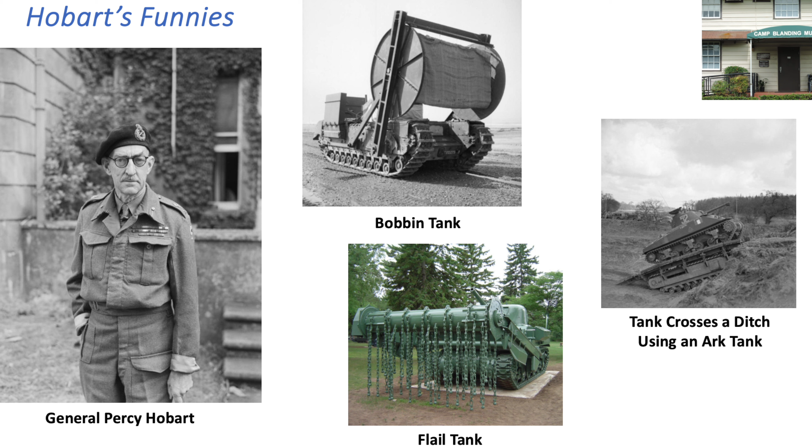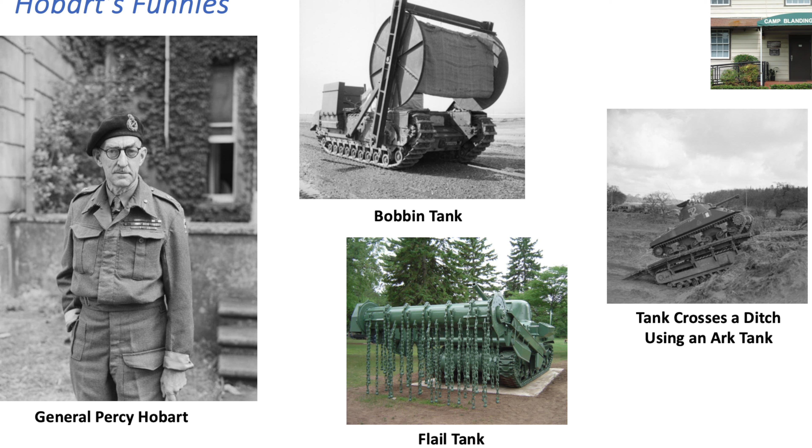The swimming DD, duplex drive Donald Duck tank, was part of a special group of tanks often referred to as Hobart's Funnies. So Hobart's Funnies were tanks modified for special purposes. For example, the bobbin tank could lay down a mat across sand to allow vehicles to cross that sand or areas of soft soil. Or an Ark tank carried a bridge superstructure that could be used to provide passage over an anti-tank ditch or a creek.

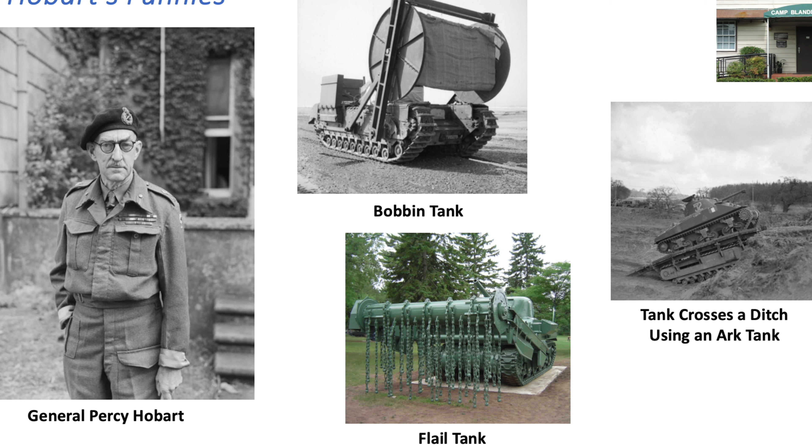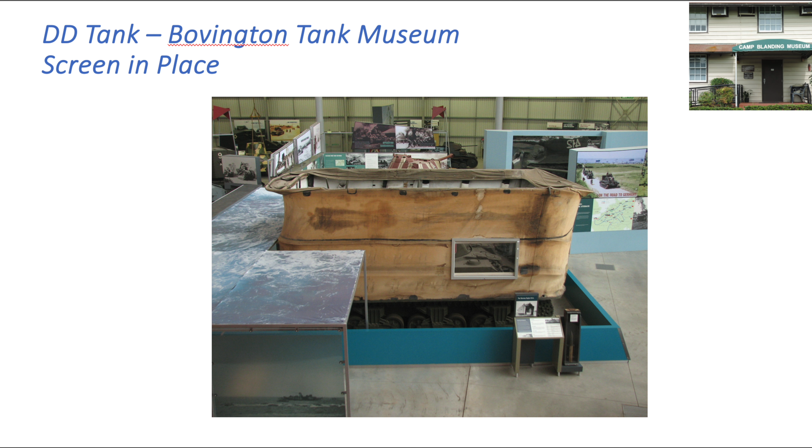Or a flail tank with its rotating drum and chains could be used to clear a path through an enemy minefield. One of the Hobart's Funnies was the swimming, or DD, duplex drive tank. The DD tank shown in this slide is on display in the Bovington, England Tank Museum. The Allies' DD tank design was invented by the Hungarian Nicholas Straussler. Straussler's design provided temporary flotation for the tank.

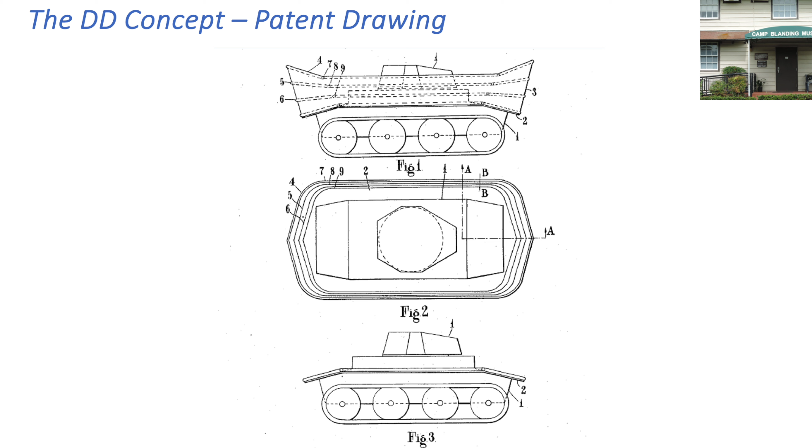A tubular framework was attached to the tank just above the tank's tracks. The framework was raised or lowered using air pressure. A heavy rubberized canvas was then attached to the tubular frame. Raising the tubular framework with the attached rubberized canvas formed a hull around the tank. The compressed air in the tubes that raised the hull provided upward pressure, which in turn floated the tank.

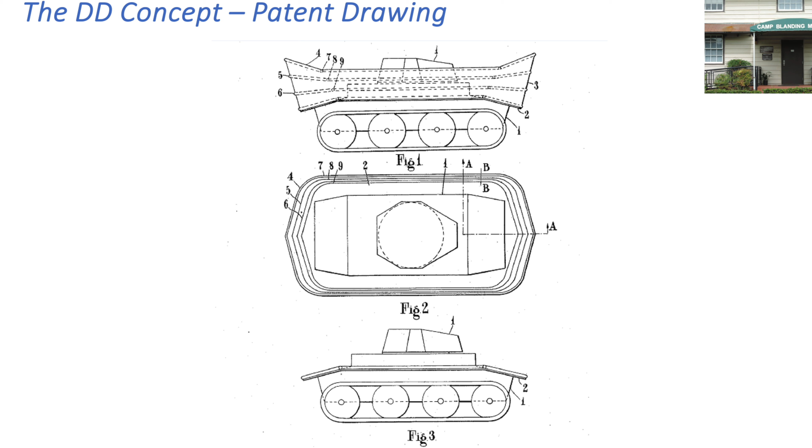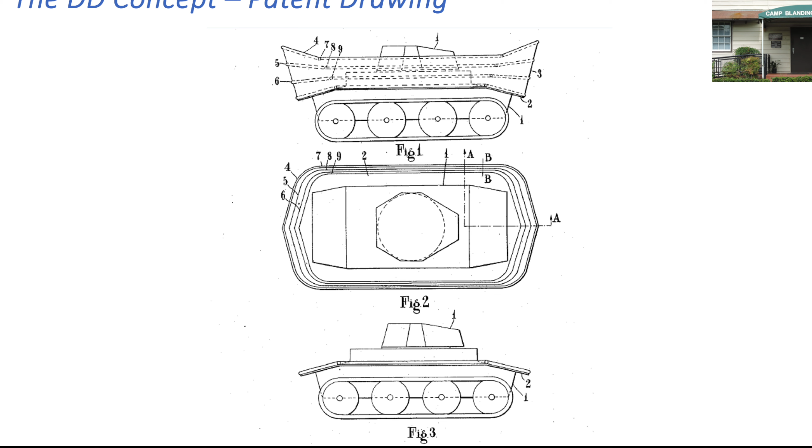Propulsion was provided by a set of propellers at the rear of the tank. These were driven by a connection to the idler rolls in the tank's tracks. To provide steerage, the propellers had a special gearing mechanism that allowed the propellers to swing from side to side. A tank crew member stood inside the flotation framework, serving as a helmsman of sorts, using a shaft connected to the propeller's gearing. While the tank was swimming, the tank's driver, assistant driver, and gunner remained inside the tank, so they would be ready for action when the tank reached the beach.

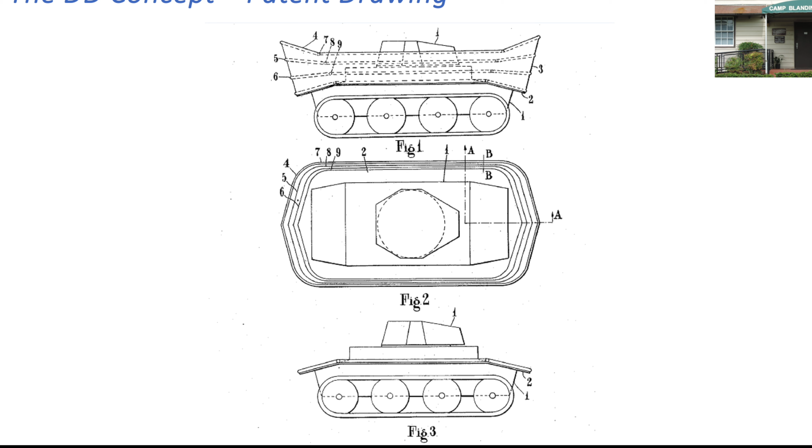When the tank reached shallow water, the tank switched from propeller propulsion to movement by the tank's tracks, and the flotation, tubular framework, and the canvas was blown off the tank by a small set of explosive charges.

During World War II, the British converted a total of 693 tanks to duplex drive on the M4A2 Sherman tank model and the M4A4 Sherman tank model. The U.S. Army converted 76 M4A1 Sherman tanks, as the Camp Blanding Museum tank is, to the DD configuration.

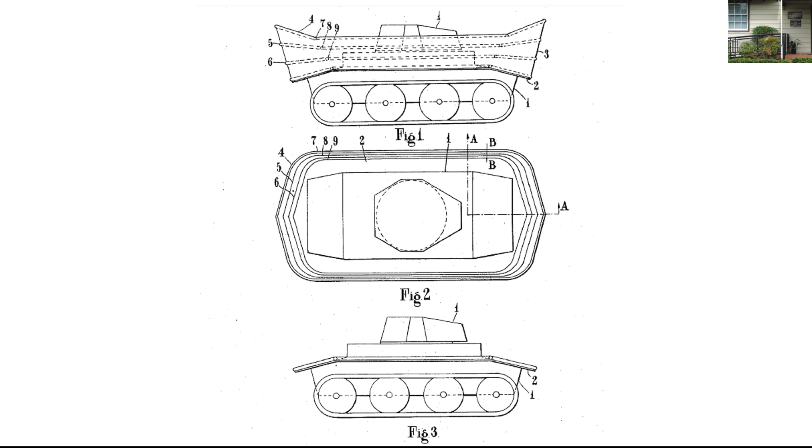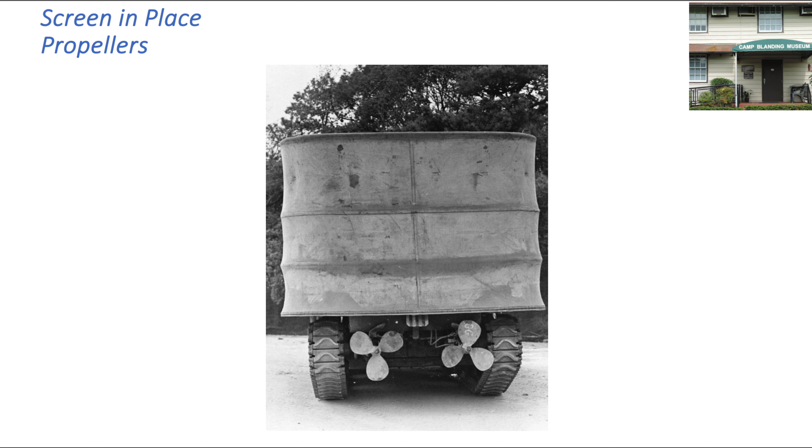When the tank grounds in shallow water, the tank drive is switched to the tank's tracks. The tank drives onto the shore and the flotation framework is blown off. Here's a view of the rear of the tank with the flotation screen in place. Note the two propellers driven from the idler rolls of the tank's tracks.

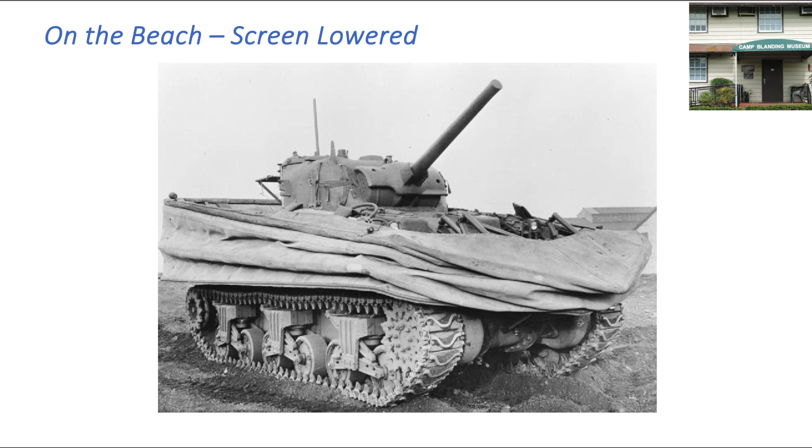Here's a view of a tank that has reached the shore and lowered its flotation system. The flotation system, however, has not yet been blown off of the tank. The greatest use of DD tanks by the U.S. Army was in the amphibious assault on Normandy on 6th of June, 1944. You will recall that the invasion was to have occurred on 5 June, but stormy weather forced a one-day postponement.

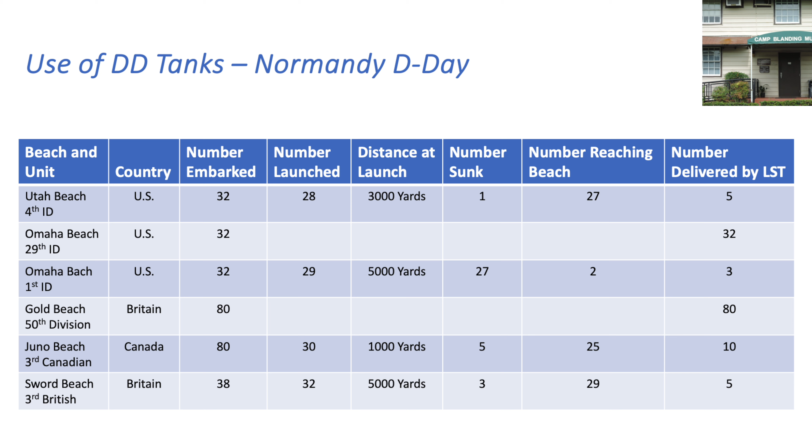The problem was that those tanks were launched too far offshore. The planned launching site was 5,000 yards off the beach, much too far out. The seas were still very rough. Fortunately, on Omaha Beach, the U.S. Navy, in a daring action, was able to provide gunfire support for the soldiers of the 1st Infantry Division. But also on Omaha Beach, note that the tanks designated to support the 29th Division on Omaha were not launched at sea, but were delivered directly to the beach, ensuring the survival of all of those tanks.

The seas the British troops on Gold Beach faced were as rough as those off Omaha Beach. Here the Royal Navy did not launch its tanks at sea, but transferred them directly to the beach. On Juno Beach, the Royal Canadian Navy took the tanks much farther inshore before launching, and a good number of their tanks actually reached the beach. And finally, on Sword Beach, the last of the British beaches, the seas were somewhat calmer, allowing a reasonably successful launch.

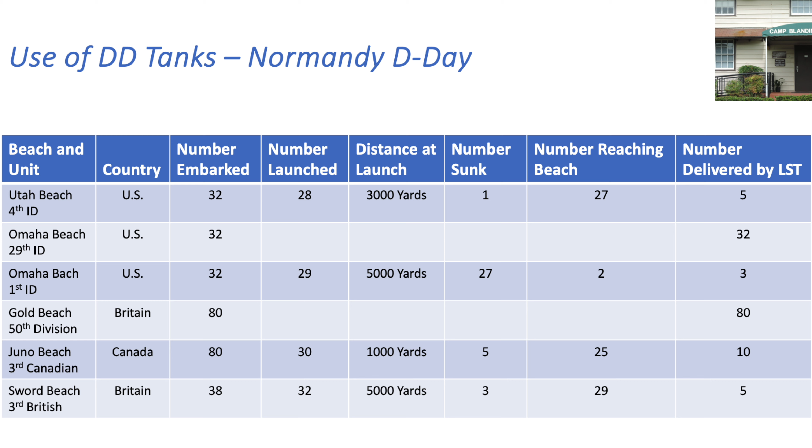The point is that while the DD tanks were indeed capable of handling moderate seas and swimming to shore, they were unsuitable for some of the heavy seas that the Normandy invasion delivered.